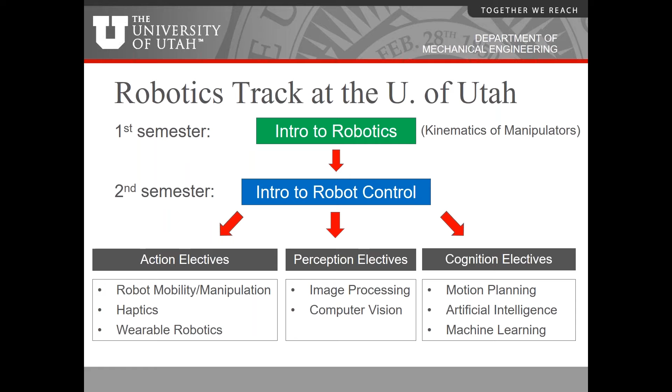To put this into context, we have a robotics track at the University of Utah where we offer master's and PhDs in robotics, and I came to Utah to be part of this track. We have a couple of gateway classes: intro to robotics in the first semester, mainly kinematics of manipulators, and then in the second semester, intro to robot control, which is my course that I've developed and been developing over the last decade. Both of these classes act as a gateway into our electives in the robotics track in various areas.

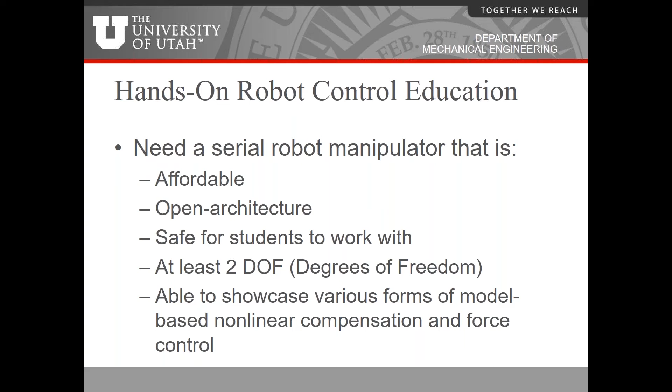In terms of hands-on control education, what I was originally looking for when I developed my robot control class was a serial robot manipulator that is affordable, open architecture, safe for students to work with, has at least 2 degrees of freedom, so we're able to showcase various forms of model-based nonlinear compensation and force control. There really wasn't anything out there that satisfied all this criteria, to my satisfaction at least. On one end of the spectrum, you could make a do-it-yourself device like the haptic paddle for under $100, but it only has 1 degree of freedom, so it's limited for teaching students more advanced concepts of robot control, controlling multi-degree of freedom systems, and compensating for nonlinear dynamics.

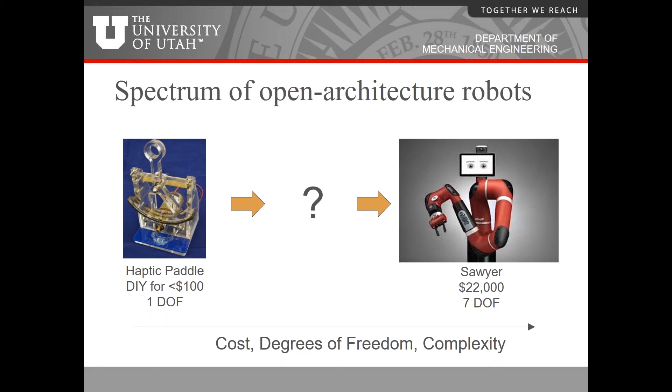On the other end of the spectrum, you could buy something like the Sawyer robot from Rethink Robotics for $22K. It has lots of degrees of freedom and can showcase all kinds of advanced robot control methods, but it's almost too complicated a starting point for students to control 7 degrees of freedom. So I really wanted something in between, and that's where Quanser came in. I approached Quanser over a decade ago now.

It's nice because since the units are all modular, we can take them apart. We can start by having the students learn to control 1 degree of freedom modules. We do that in our classical control class as well as our state space control class.

We have various of Quanser's other add-ons such as the inverted pendulum add-on and flexible link and flexible joint add-ons for these modules. But when it comes time to use these in my robot control class, we put them together with the 2DOF add-on and form these 2 degree of freedom manipulators, which are just complex enough to demonstrate some of the nonlinear model-based compensation techniques, but not too complex. Makes a good starting point for the students.

They're very safe to use. They're incapable of harming anybody. The current to the motors is strictly limited to 1 amp, so they can't really have enough torque to hurt anybody. The other nice thing about these robots is by mounting both of the motors on the base on the table, you avoid carrying the weight of the second motor on the links themselves. So we can use nice lightweight links and get nice high-speed motion out of these linkages while keeping the heavy motor stations on the base of the robot.

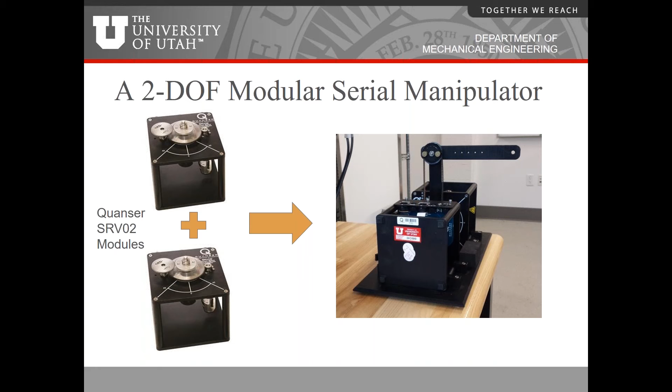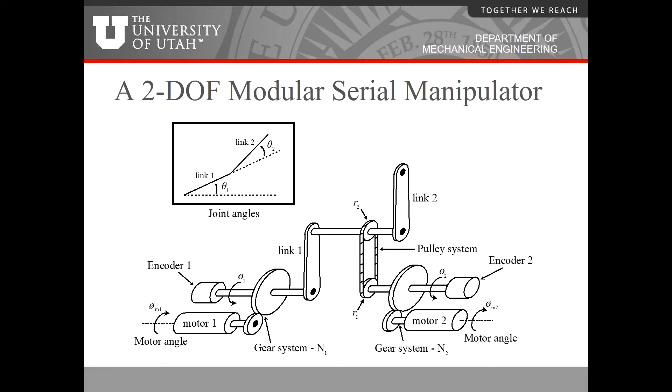So motor number 2 is driving link number 2 through that pulley system, allowing motor number 2 to keep its weight on the table rather than on link number 1. Encoder number 2 is positioned such that on the near side of the pulley system, it's actually measuring the absolute angle of link number 2, which turns out to be convenient, as I'll show you in a minute.

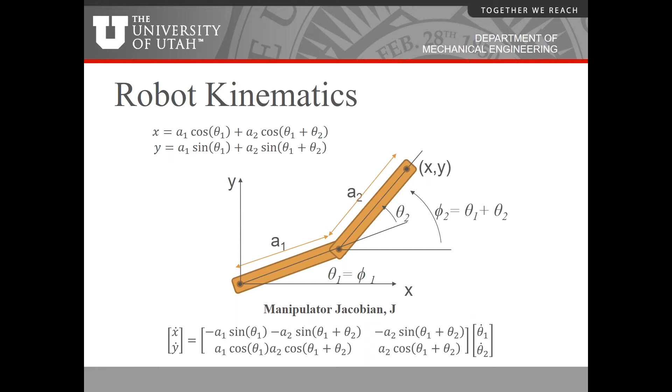Again, I won't spend too much time on these kinematics, but this is the first step in presenting the math to our students. We show them how you can relate the position of the end effector of this robot, XY, to the joint angles, theta 1 and theta 2. Here in this figure, theta 1 and theta 2 are the relative joint angles between the 2 links. You can see how those are related to phi 1 and phi 2, the absolute joint angles of the 2 links. The two are related between each other via what we call the transmission kinematics.

There's a matrix that relates the relative joint angles thetas to the encoder angles phi, which happen to coincide with the absolute joint angles of the robot through this matrix, which we call the pulley Jacobian, which contains ratios of pulley diameters. In our situation, the pulley diameters are equal to each other, so everything simplifies to a very simple pulley Jacobian, which means that what our encoders are measuring corresponds to the absolute joint angles of the robots with respect to the base frame of the robot.

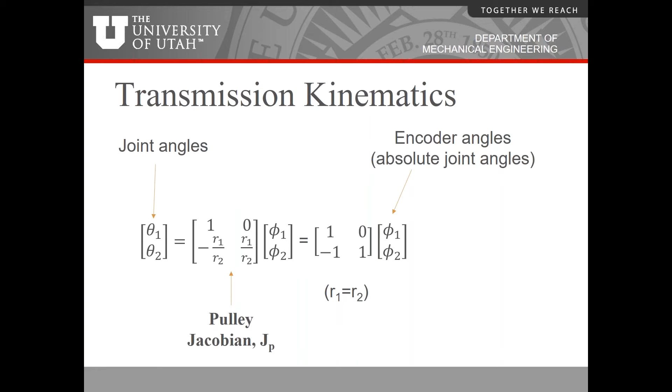We also emphasize with our students the duality of this Jacobian. The Jacobian for this robot not only relates the velocities of the joints to the velocity of the end effector, but it also relates the torques between the joints and the forces at the end effector. This is going to come in really useful when we do various kinds of force control.

We can actually compound our manipulator Jacobian J with our pulley Jacobian JP to form one big compound Jacobian that maps directly from our encoder angles, what we're measuring, to the end effector or operational space or task space velocities of the robot. That same compound Jacobian transpose is what relates the forces at the end effector to the joint torques.

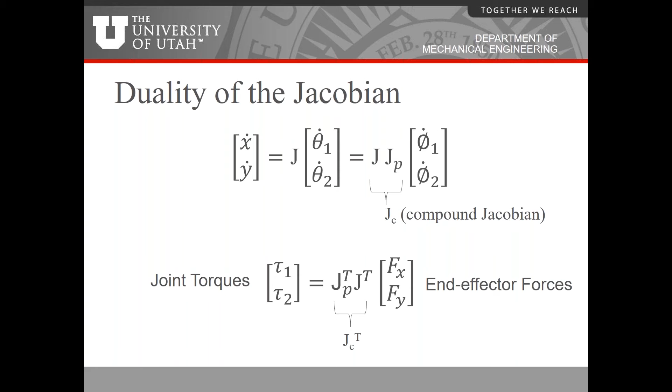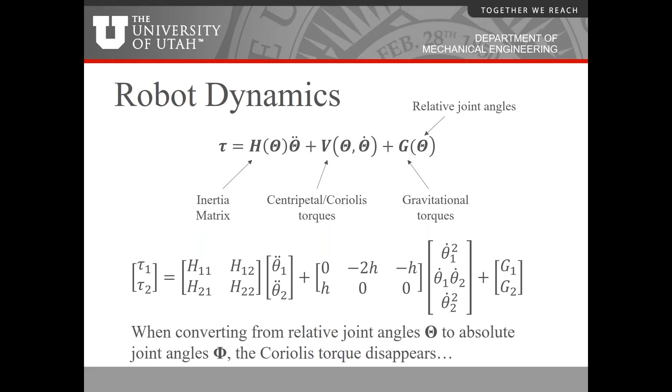The interesting thing about this robot, the way we've configured the kinematics with that pulley system, is that when you convert from relative joint angles theta to the absolute joint angles, which is what we're measuring with the encoders, the Coriolis torque actually disappears. Some of you may know the Coriolis torque is just an artifact of using a relative coordinate system, and so when we abandon those relative joint angles, those go away.

So here's what our final dynamics of the robot look like. On the left-hand side, we have gear ratios N1 and N2 times motor torque constants, KT1 and KT2, times the current. So we're actually controlling the current to our motors.

In addition to these 2-DOF robots from Quanser, we also have some of Quanser's AMPAQ amplifiers that are capable of sending controlled current to each of the motors. We do it that way because by controlling the current to the motors, we can make sure that we're not sending too much current. We can keep our motors from burning out, and we don't have to worry about back EMF terms appearing in our dynamics when we control the current.

On the left-hand side of the equation, we're inputting current, and on the right-hand side, we have all the torques again: the inertia torques, the centripetal torques, Coriolis torques have gone away, gravity, and then we can also add in some frictional torques. For this Quanser robot, we've relied on Quanser to provide us with the mass parameters of all the links, and we've experimentally identified some of the friction and damping parameters. So we have good values for all of the numbers that go into the dynamic equation.

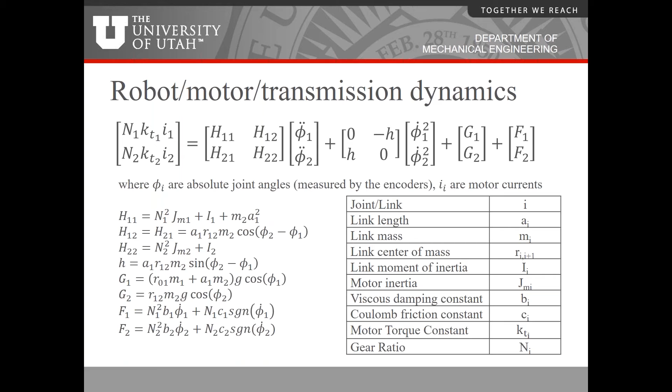And therefore we can use that knowledge to compensate for all the nonlinearities of the robot as we teach the students how to control it.

In teaching the students how to control the robot, we do it both in simulation and in real time on the real hardware. This is one of the nice things about being able to use MATLAB and Quanser's QUARC software. So we have MATLAB, we have Simulink, and we have QUARC installed from Quanser. In addition to that, I put together a custom graphical user interface, which I programmed in MATLAB, that allows the students to visualize the motion of the robot.

The way this works is the graphical user interface places an event listener inside of the Simulink model on one of the scope blocks. I'll show you in a second. As the Simulink model is running and sending data to a scope block, that data is then sent over to my graphical user interface, which uses those joint angles to plot the configuration of the robot. We can do this in simulation, or in real time on the real hardware.

Let me close out my PowerPoint presentation for a moment and switch over to MATLAB and show you how this works.

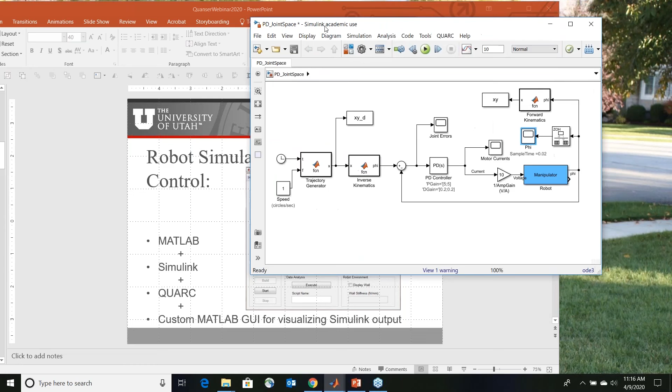Here's an example of one of our most simple Simulink models, where the students start out with basic PD control on both joints of the robot. This is basic decentralized control; we're not doing any model-based compensation right here. I've got this blue block in my Simulink model that's simulating the dynamics of the robot manipulator.

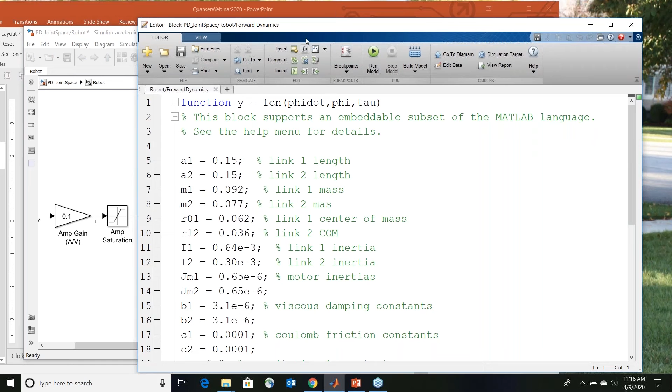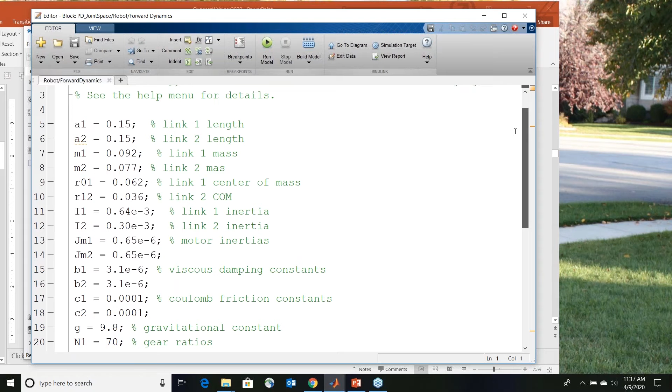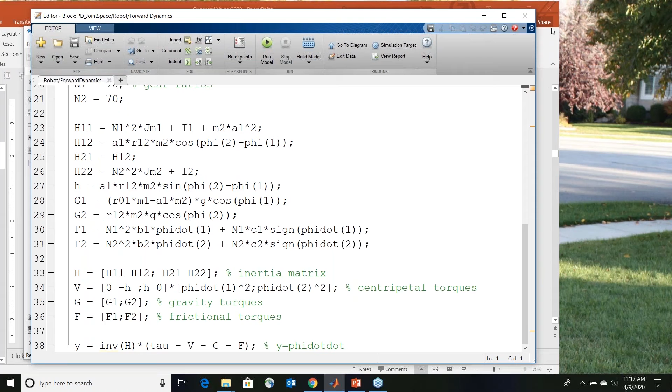If we look inside of there, we've got the forward dynamics of the robot programmed in as an embedded MATLAB function. You can see here, I've got all of those mass and friction parameters of the robot plugged in with the actual values we've experimentally identified. Then we can form our gravity matrix, our friction matrix, our centripetal matrix, our inertia matrix, and we put this all together and basically simulate the actual dynamics of a real robot, based on the parameters as closely identified as possible.

So we've got this blue block outputting phi, our encoder angles, as if we were actually measuring those. We compare them to a desired trajectory. I've got a trajectory generator here generating a circling trajectory in operational space for the robot, so we're essentially telling the robot to draw a circle in space as best as it can. We pass those through the inverse kinematics of the robot, which creates a desired trajectory in joint space, or encoder space. We form an error in joint angles and then penalize that with a PD controller, and we're all set to go.

At this point, you can just hit the play button on this Simulink model and run it as is, or you can run it through my graphical user interface. So we type in the name of my model, hit load, and then I can change the speed of the trajectory. That pokes different values into my Simulink model, and then I can hit the start button, and it commands my Simulink model to start running.

Here we can visualize the motion of the simulated robot trying to draw a circle in task space, or operational space. This is a relatively slow trajectory, and you can see that at slow speed, the robot does a pretty decent job of drawing the circle and tracking the desired trajectory.

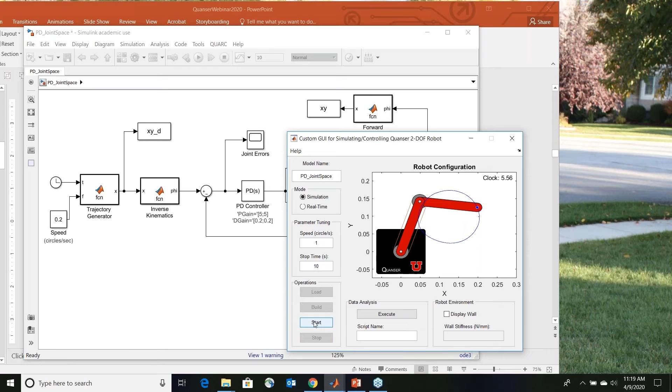But if I stop this and speed up my circle to one circle per second, now you can see the robot's going to have a harder time dealing with the nonlinear torques created by the inertia coupling, the centripetal torques, the frictional torques. So the circle is kind of egg-shaped because of those nonlinear dynamics.

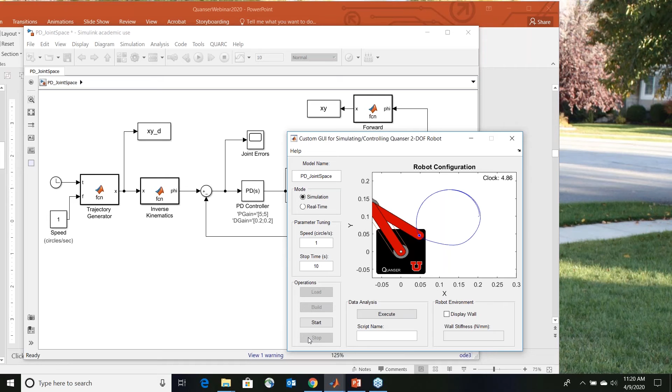So what the students find out is that using PD control alone is not enough to do good trajectory tracking at high speed. We could try to increase our PD gains even further, but then you end up saturating the amplifier - you can't deliver enough torque to the motor. So the message moving forward is that we need to learn to compensate for these various nonlinear dynamics, for the inertia coupling, for the centripetal and Coriolis stuff, in order to get good trajectory tracking at high speed.

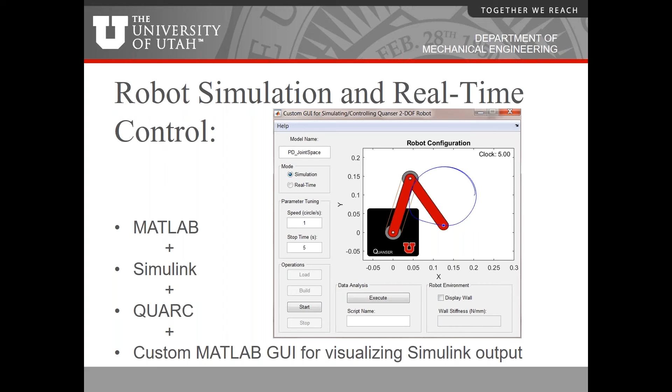So again, the great thing about this is the students can try their controller first in simulation, make sure that it works in simulation, then they can take that exact same controller, swap out the blue block for the hardware input and output block, and try that exact same controller on the hardware with the exact same values and see how it works in real life.

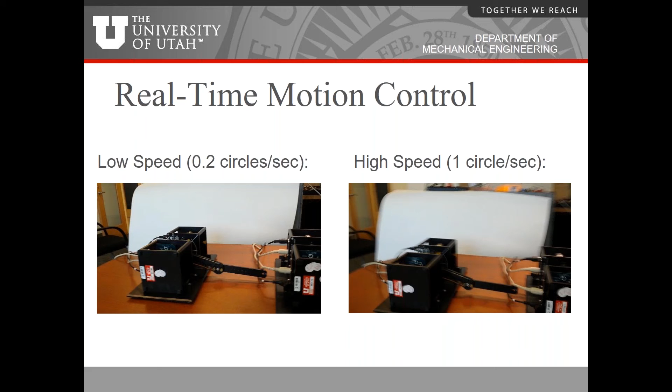I'll show you quickly some of the different controllers that we teach the students. So again, this is the one I showed you a moment ago in Simulink, simple decentralized PD control. There's no model-based compensation at all here - each joint is penalized with a proportional and derivative gain, and each joint is doing its own thing without regard to what the other joints are doing. So yes, the robot can draw a circle, but it doesn't do very well at high speed.

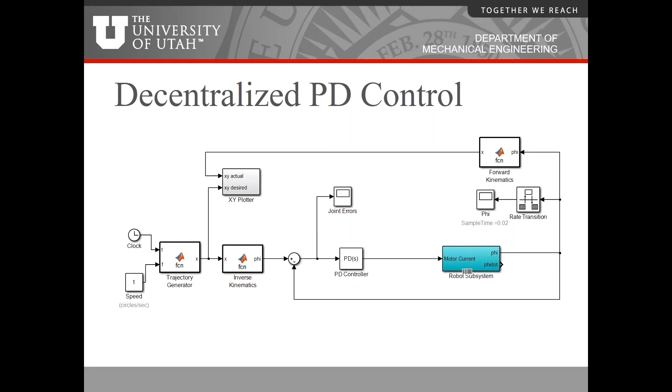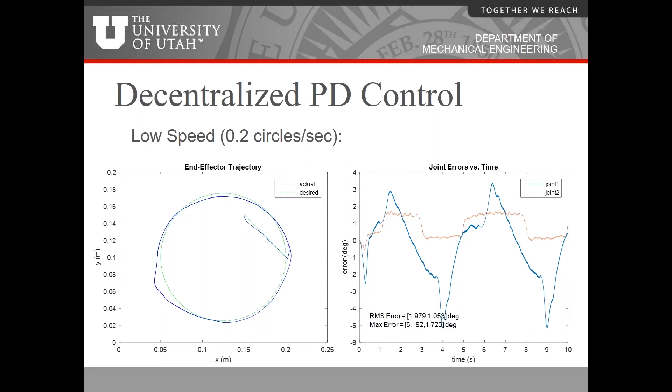Here's an example. It shows a plot of the actual trajectory over top of the desired trajectory, and we can plot the joint errors versus time. The students can compare the performance both at low speed and at high speed. We can see at high speed, the trajectory becomes even worse due to those nonlinear dynamics.

And so then we go through a progression of different tracking controllers. We next try computed torque feed-forward control, where we have a complete model of the robot dynamics and use that to compensate for everything. Then we have inverse dynamics control.

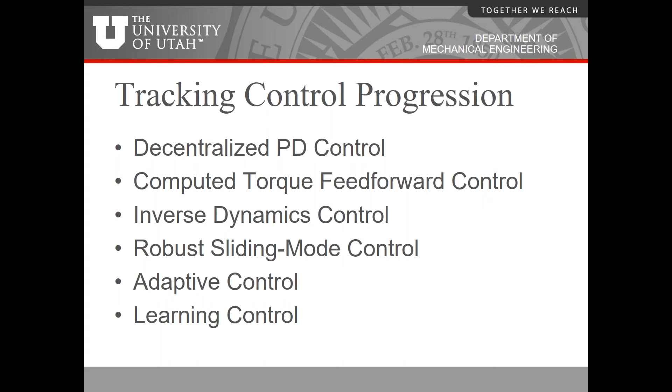It contains a complete model of all the dynamics of the robot - all those inertia parameters, friction parameters, gravity parameters. We're basically using the desired trajectory of the robot to calculate at each instant in time how much torque each of the robot's joints need to compensate for all of those dynamic effects.

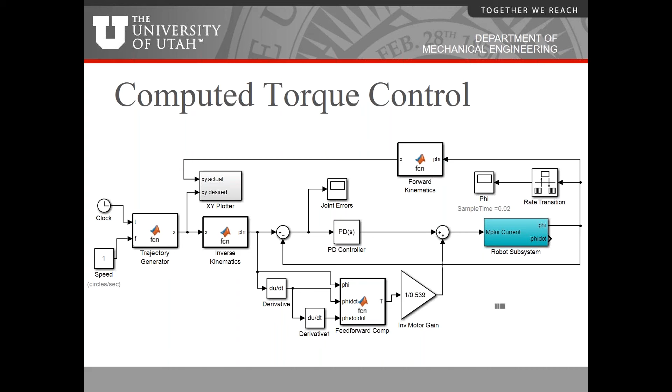And then we feed that forward to our manipulator. Okay, so that works much better than PD control alone, but it's still not really decoupling the dynamics for us. If you recall the slide showing the dynamics of the robot, the inertia matrix is coupled - a torque on one joint creates motion on another joint and vice versa. So in order to do the best control, we need something that can decouple that inertia matrix so that if there's an error on one joint, I can send torques to both joints in the right proportion to reduce that error.

That's what inverse dynamics control does for us. This is the next step in teaching the students. We have some feedback compensation in this case that cancels out gravity and centripetal torques. But then we take our inertia matrix and place it in series with our PD gains here. This actually decouples the influence of the PD gains on the robots.

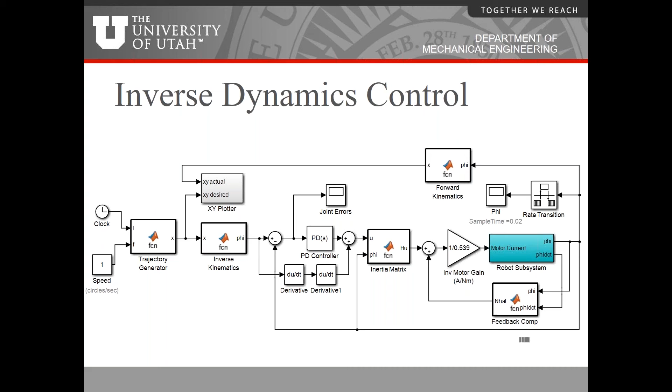By multiplying the PD gains by the inertia matrix of the robot, which is coupled, that distributes torques to both motors of the robot in just the right proportion to take care of error on either of the joints. So this is what we call centralized control - rather than each joint doing its own thing, now we have one centralized controller sending torques to both motors in just the right proportion to handle the errors.

Then we can try robust control. So we have the same inverse dynamics control down here, but then we pick off our tracking error and create a sliding surface up here. Some of you may be familiar with sliding mode control. It's kind of like a bang-bang controller that hits your motors as hard as it can in one direction or the other, depending on the sign of the error.

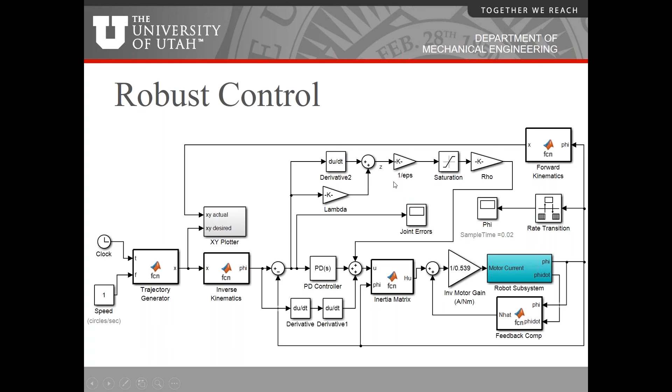Adding in the sliding mode action, the torque from the sliding mode controller comes down here and adds in with the effort from our PD controller. The students find that this works really great in making your controller robust against modeling error. So now they can go in and intentionally alter some of the mass parameters in this blue block, or some of the friction parameters, pretend that they don't have an accurate model of the robot, and see how well this robust controller compensates for that.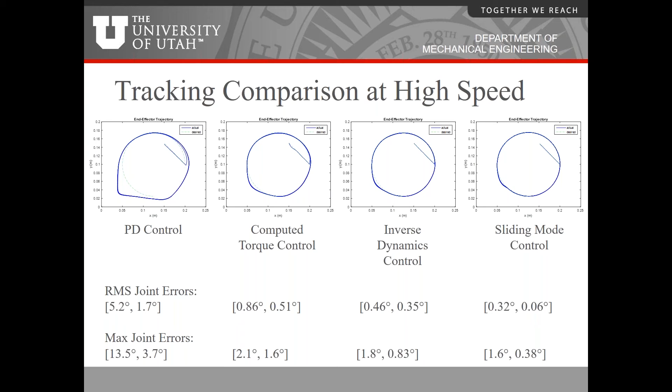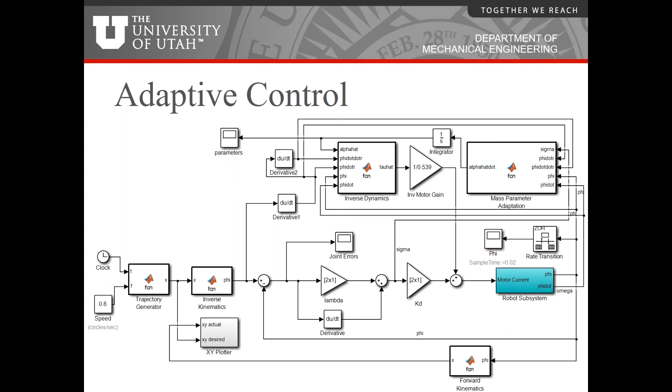And then we can also do adaptive control. This would be a scenario where we're pretty confident that we have the dynamic equations correct for the robot, but what if we didn't know the values of all those mass parameters? So we can teach the robot to adaptively learn what those mass parameters are. When we implement adaptive control, the robot will start circling, and with each circle, it'll get progressively better as it's adapting to the unknown mass parameters of the robot.

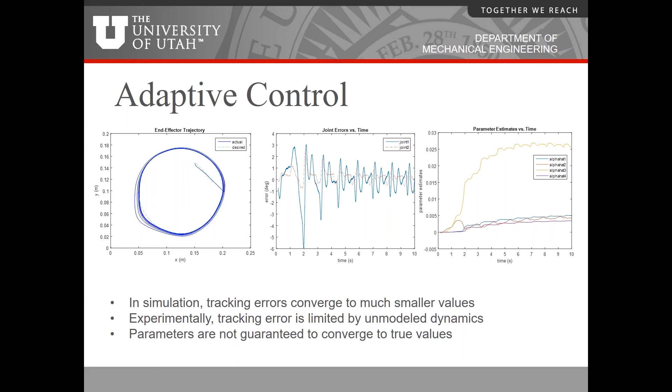So it's a fun learning experience for the students. They try each of these controllers out in simulation first, and then they try them on the real robot hardware. And of course, nothing works as well on the real hardware as it does in simulation. That's the real value of having a hands-on education like this - they can see what really works on the real robots.

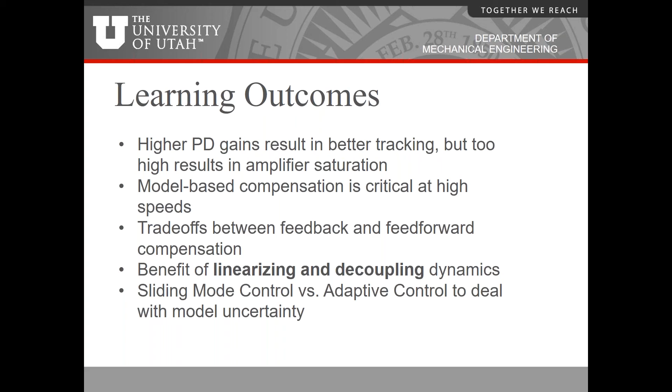So just in summary for that section, the learning outcomes are: students learn that higher PD gains result in better tracking, but too much results in amplifier saturation. And so you need model-based compensation, especially at high speeds, to get good tracking error without saturating your motors. Students can see the trade-offs between feedback and feed-forward compensation, the benefit of both linearizing and decoupling the dynamics of these robots, and they can experiment with different ways of dealing with model uncertainties, such as sliding mode control versus adaptive control.

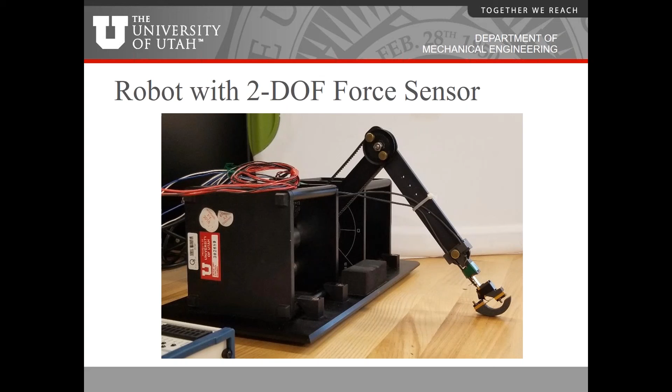Okay, so what's even more exciting: we spend the first half of the course doing these various types of motion control, and then in the second half we do various kinds of force control. In order to do force control, we came up with a way of making our own 2-degree of freedom force sensor on the cheap that we could add to the end effector of our Quanser robot, as you see here with a zoomed in view.

So we purchased some thin beam load cells from Omega, under $100 each, and 3D printed some parts to hold those. We've got the two thin beam load cells oriented orthogonally to each other, so we can measure forces in both the X and Y direction of the robot as it moves in the plane.

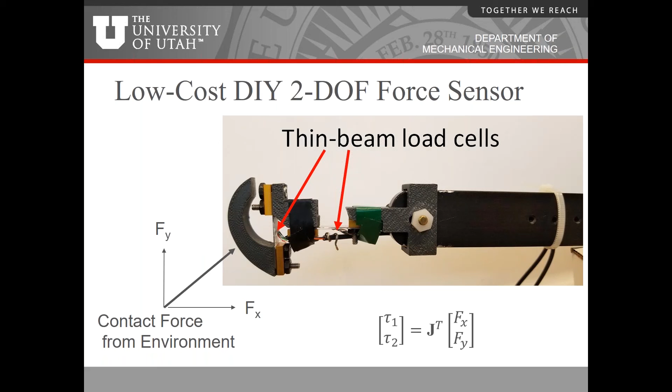And then, of course, a reminder that if we measure these forces, Fx and Fy, that the robot is pushing on the environment, or the environment is pushing on the robot, depending on how you look at it, we can use the transpose of our Jacobian to map those back to equivalent torques at the joints of the robot, in order to compensate or apply the required torques to match the force.

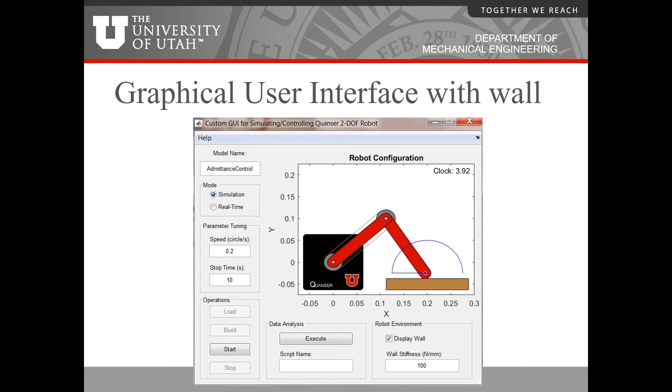So before we introduce force control, we teach the students about how to switch your controller from joint space to operational space. All the controllers I showed before are in joint space: we're generating a desired trajectory, using the inverse kinematics to put that in terms of the joint angles, and then we feed back our joint angles, creating an error in the joint angles and penalizing that with PD gains. So our penalty is occurring in joint space.

The alternative is to do this all in operational space, or task space. Here, we generate our trajectory in XY coordinates for the end effector, but now we don't need the inverse kinematics anymore. We form an error in operational space in terms of the error in the position of the end effector, and penalize that with a set of PD gains. That creates a penalty force in task space, and then we use the Jacobian transpose to map that back to an appropriate penalty in terms of joint torques, which you can then send to our robot manipulator.

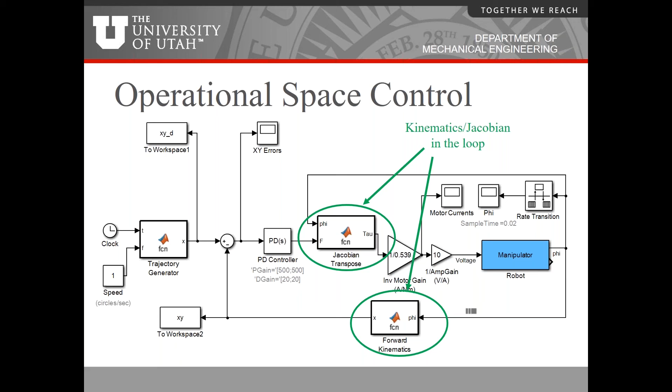And then, of course, we need the forward kinematics in the loop so that we can take our encoder angles phi and calculate the position of our end effector to feed back and compare it to our desired position. So this is an operational space controller where we have the Jacobian in the loop, and the students appreciate the utility of knowing the Jacobian. In this case, the compound Jacobian—we've got to include the pulley Jacobian in there to properly map between operational space and joint space. And then we do a progression of different force controllers.

So starting with this PD control in operational space, we can teach the students to do what I call stiffness control, which basically means you just intentionally lower the PD gains in certain directions.

For example, if I want the robot to be pushing against the tabletop and not exert too much force, we don't want to damage the robot or the force sensors. I can lower my PD gains in the Y direction, the vertical direction, to mitigate the force against the tabletop. Those PD gains act like a virtual stiffness and damping on the robot. We can upgrade that to full impedance control, where we specify a desired stiffness, mass, and damping in both the X and Y directions for the robot to behave like.

We then teach the students compliance and admittance control, which are very similar, but the causality is flipped. I'll talk about that in a second. We teach hybrid position force control, and then we can do stuff with multiple robots. So we try some multi-arm coordination using 2 robots and some master-slave teleoperation using 2 robots.

Here's an example of what happens with stiffness control. If I take that PD control in operational space and lower my PD gains in the Y direction, then when the robot comes into contact with the tabletop, it reduces the contact force. The robot's actually trying to do a circle still, but then it hits the tabletop, and it's forced to only do a hemicircle trajectory when it really wants to do the full circle trajectory. This entire direction where it's cutting across the circle, that's when it's in contact with the tabletop. We can plot the forces versus time over here.

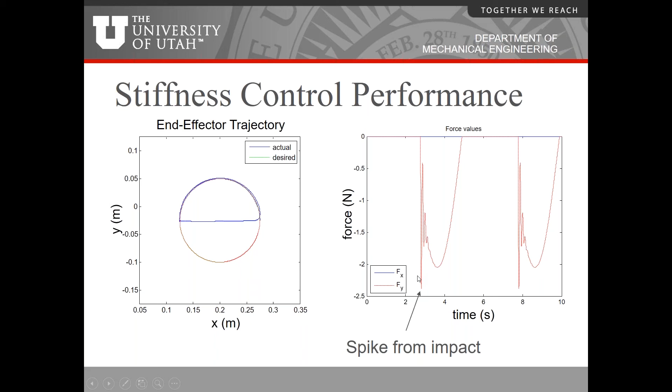That's when we need to move to full impedance control. With full impedance control, we actually put the inertia matrix back in here. It's kind of like inverse dynamics control. In order to control the inertia of the robot, technically you'd need to feed back acceleration, but we don't like to do that because we don't have an acceleration sensor, and we don't want to double differentiate position signal, which leads to noise. So instead we cheat by feeding back force as a measure of acceleration, and then we can divide that by our desired mass matrix.

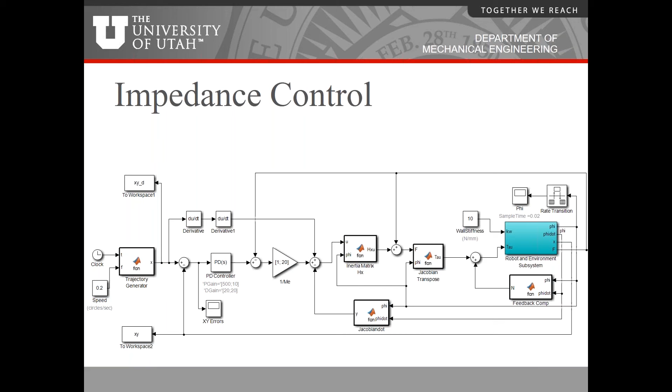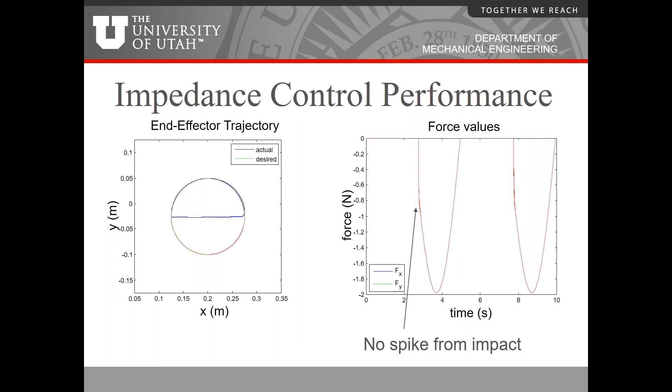So right here, this 20 means that I'm trying to reduce the effective mass of the robot by a factor of 20 in the Y direction. We're taking this heavy, in quotes, robot and making it behave like it's much lighter than it really is. When we do that, we can see that we get rid of that impact force. Now it's as if the robot virtually has much less inertia than it did. So when it hits the wall, that impact force no longer creates a big spike.

We can do something similar with admittance control. Here the causality is flipped. We're taking force feedback from the robot, putting it through a compliance or admittance transfer function, and using that to alter the desired trajectory of the robot in a mass spring damper-like behavior. Then you can control the mass, stiffness, and damping by picking the parameters in this transfer function.

You can see in this case, I've got a Y admittance, so I'm making the robot behave like a mass of 1, a damping of 10, and a stiffness of 25 in the vertical direction. There's 0 admittance in the horizontal direction, since we want the robot to keep doing good tracking in the X direction, but be sensitive to the force in the Y direction.

We can feed that back and alter our desired trajectory in response to the force from the force sensor. The benefit of admittance control is I can keep my PD gains very high, so I still get really good trajectory tracking when the robot is not in contact with the wall. But when the robot is in contact with the wall, it's very sensitive to that force according to the admittance parameters that I define.

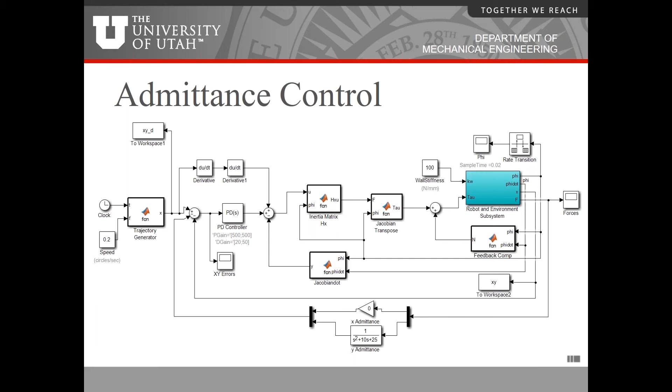The only downside of admittance control is the students find that it's much less stable than impedance control. Because of this admittance transfer function, we're adding a couple extra poles to the dynamics of our system. That makes this system more prone to going unstable, especially when you're in contact with a relatively stiff wall. The wall stiffness acts as part of the root locus gain in the system, so a stiff wall drives the system unstable for admittance control.

So similar performance with the admittance controller, only much better trajectory tracking than impedance control. But like I said, it has stability issues when the environment's stiff.

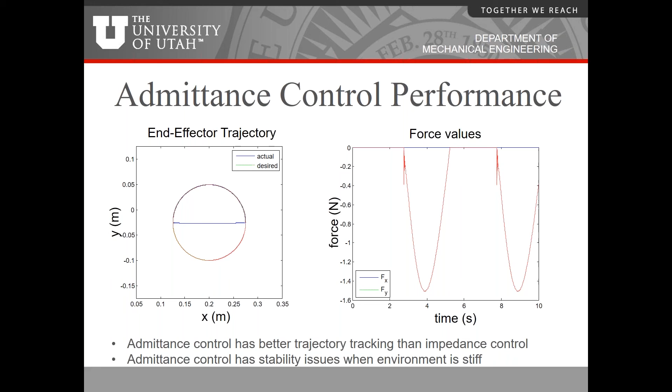And then we move to hybrid position force control. This is where you want to control position in some axes, but force in other axes. So again, picture the robot stroking the tabletop. What if we want to actually control the force against the tabletop to some desired level while stroking back and forth in the X direction? And so that's what this does.

So we have on the upper half here a position controller, generating a sinusoidal trajectory back and forth in the X direction for the robot. And then on the bottom half, we have the force controller. We specify a desired force of -2 in the Y direction, basically telling the robot to push down on the table with a constant force of -2 newtons while stroking in the X direction.

So we penalize both the position error and the force error, and then pass those through a pair of selection matrices, which basically says only do position control in the X direction, only do force control in the Y direction, then add those two control efforts together at this big central summing junction. Over here, we've got inverse dynamics control again, which decouples the dynamics of the robot so we get good performance.

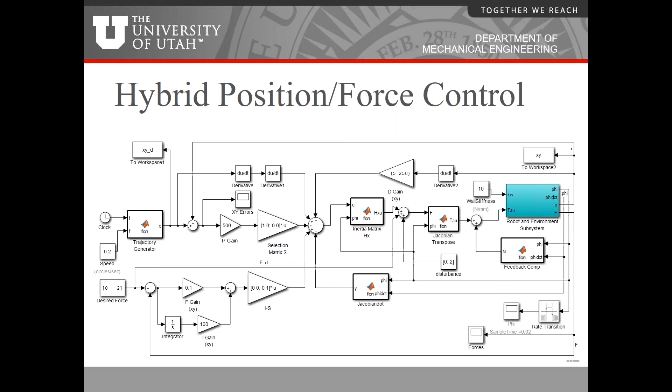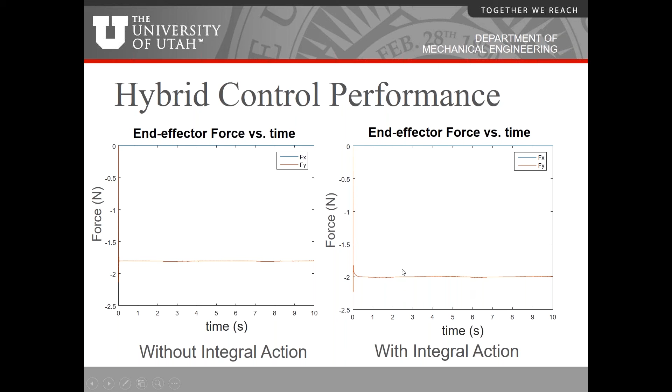So the students can try that as well, both in simulation and on the real robots. Then the students can monitor the forces versus time. They can see how, for example, on the left, without any integral action on their force controller, it can't quite get to the desired force of -2 newtons. With the integral action on the force controller, they can get exactly the 2 newtons of desired force that they want.

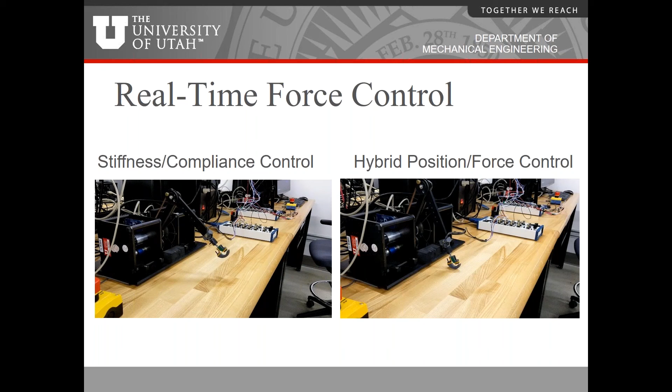Here's some videos. On the left, you can see the stiffness controller. The robot's trying to draw a circle, but the circle brings the robot into contact with the tabletop. By making the robot compliant in the vertical direction, that mitigates the contact forces that occur when it hits the tabletop. On the right-hand side, we have a video of hybrid position force control, where the robot is stroking back and forth on the tabletop, trying to keep that force against the table to a constant 2 newtons while stroking back and forth.

And then of course, in practice, with the real robots, we've got friction coming into the picture. So the students can see, okay, in simulation the hybrid controller did great, but now in practice, when we've got all this friction present, how is the hybrid controller actually doing?

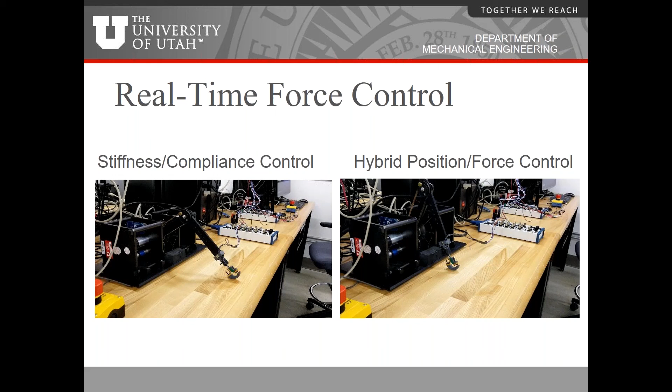I'll skip this since we're running low on time.

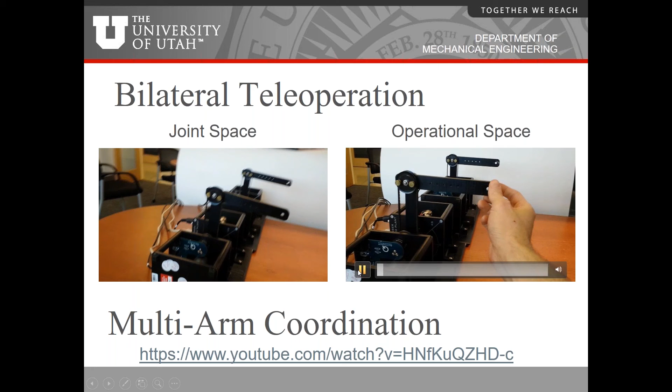We can also do teleoperation with a pair of these 2DOF robots. One can be the master, one can be the slave. We can do this both in joint space and in operational space. When I grab the master and move it, the slave robot is basically replicating the joint angles of the master robot. Or on the right-hand side, we do the same thing in operational space, only now we're just telling the slave robot to follow the end effector position of the first robot.

And so the fun thing is when you do this in operational space, if you bring the robot to its singularity, you can get the slave robot to toggle between its elbow up and elbow down position. The operational space controller doesn't care whether the robot's in elbow up or elbow down as long as the two end effector positions are still matching.

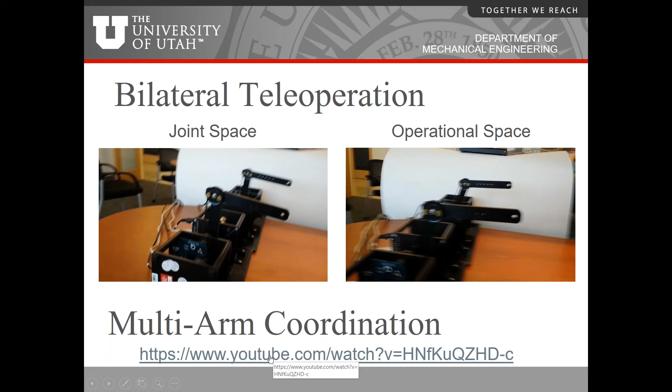And then we can also do multi-arm coordination. I'm going to click on a YouTube video here. This was a special project that some of my students did at the end of the semester.

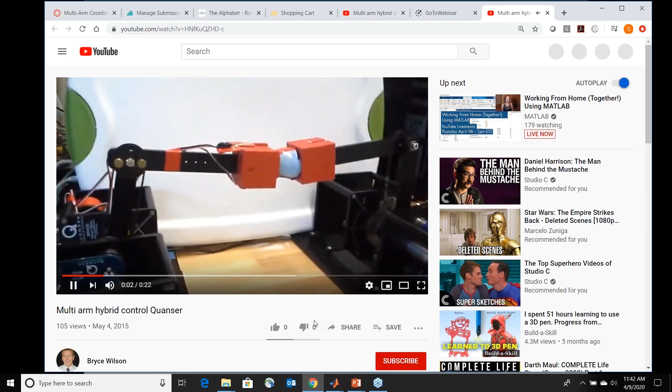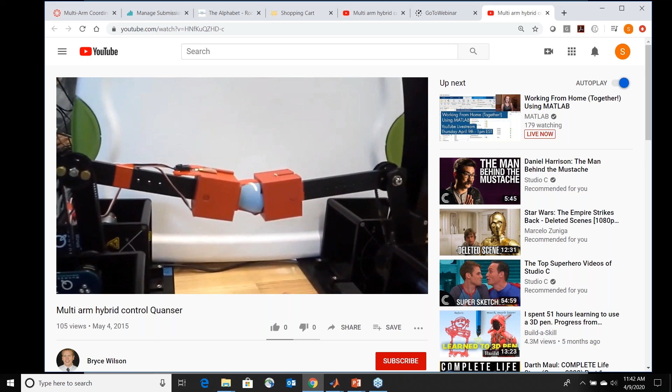They got 2 of the robots to cooperatively work together to carry an egg. We implement this multi-arm coordination as a form of hybrid position force control. By formulating a special task space, you can get the 2 robots to share the burden of both controlling the position and the forces on the egg. That's kind of fun for the students to do.

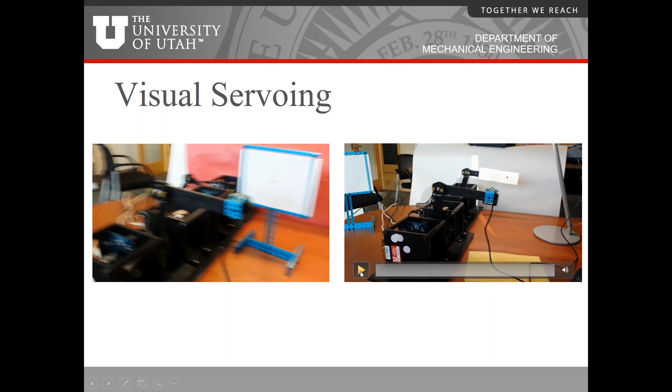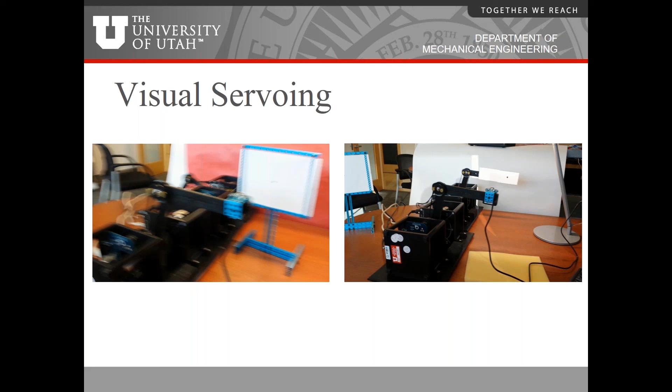Position control, various forms of position control take us through the first half of the semester. Then all of these force and interaction controllers take us through the second half of the semester, and we're done.

Just to summarize, we've developed this 2DOF robotic platform. It's modular, you can take it apart, and use it with different Quanser add-ons. It's open architecture - this is really important. We can directly control the torques on the motors to compensate for all of these nonlinear dynamics and various kinds of force control. It's safe to use, not capable of hurting anybody. And it has just enough degrees of freedom to demonstrate the key robot control principles, such as compensating for nonlinear dynamics, using the kinematics and the Jacobian in the loop to map between joint space and operational space. Working in operational space makes it convenient to try all these different kinds of force control and teleoperation and multi-robot coordination. So I'm going to stop here and open it up for questions.

Thank you very much, Steve, for a fantastic presentation. Very, very interesting stuff, especially the simulations of your visual servoing, comparing it to the reality was very interesting.

We do have quite a few questions. Some are focused on the technicality and the different types of control algorithms that you use, but there's also a few on the course itself and the nature of the course and its prerequisites. So let's try to get as many as possible, and encourage people to continue sending their questions. But the first one, let's start with one about the controller. The question is, what are the advantages of using a PD controller, and why not use a PID?

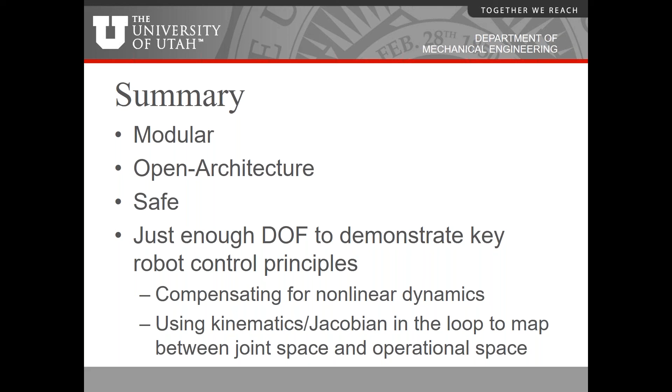Thank you very much. The next question is about force estimates. How do you calculate or estimate the forces, the contact forces that are being applied to the system? So when we do this in simulation, well, I can actually show you.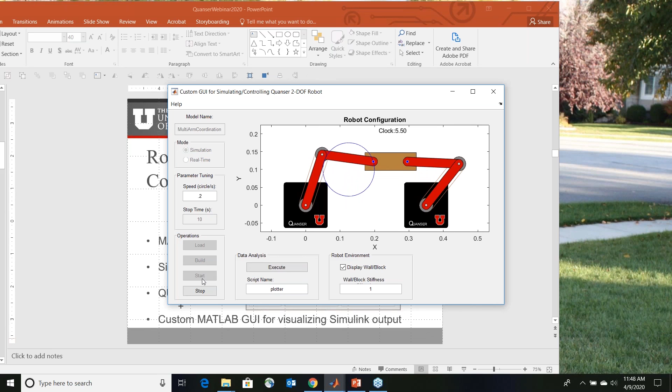Since you asked, here's a simulation of two robots working together to carry an object. If I look in the Simulink model, in my blue block, it's now changed from a robot dynamics block to a robot environment block. And in here, I have a block called block dynamics.

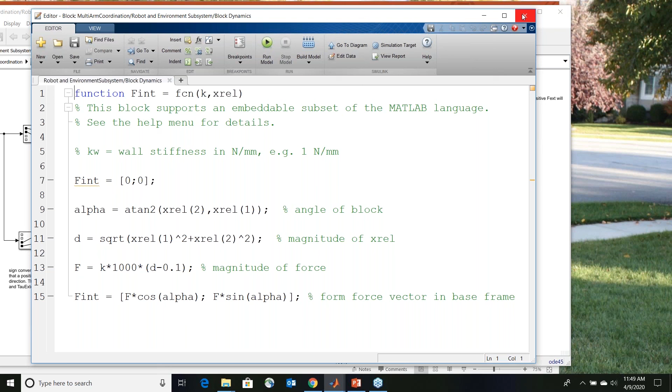I'm basically programming the block, in this case the environment, to act like a spring. So it then simulates forces based on a spring law for the environment. It does the same thing when I've got a wall in the environment, approximating the wall as a virtual spring where I can set the stiffness. And so it generates these virtual forces, which I can feed back and use for simulating my force control.

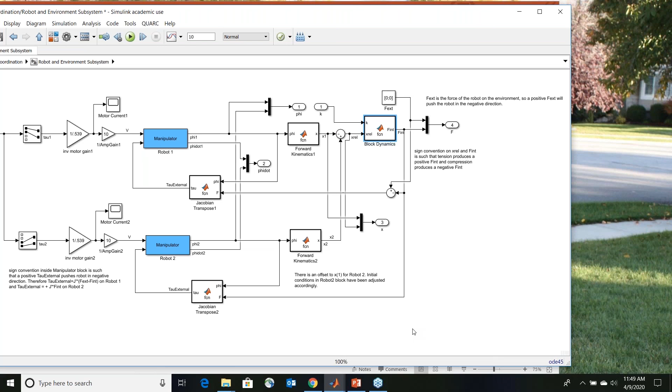Of course, when we do this on the real robots, I actually have that 2DOF force sensor on the robots, which measures the force in the X direction and the force in the Y direction. That's in the frame of the end effector of the robot, so I can use a rotation matrix to rotate those into the base frame, and then use that in my various forms of force control.

Thank you so much. One more, in the visual servoing example, what type of controller was being used there? Yeah, so that was an image-based visual servoing.

So Quanser has these handy blocks that work with the Point Grey Research cameras. They have a block that will capture an image from the camera for you, a block that'll process that image, and output the XY coordinates of the dot in the image. And so then we can use those XY coordinates of the dot as features for image-based visual servoing.

So I can specify my desired feature values, basically the pixel coordinates of the center of my image. I desire for the dot to be in the center of the image. I compare that to the actual XY coordinates and then put a penalty on that. And then I have to create an image Jacobian that maps between feature space and joint space of my robot.

And so the controller looks very similar to my force controllers, only instead of penalizing the force and using the manipulator Jacobian, in this case I'm penalizing the image features and using an image Jacobian.

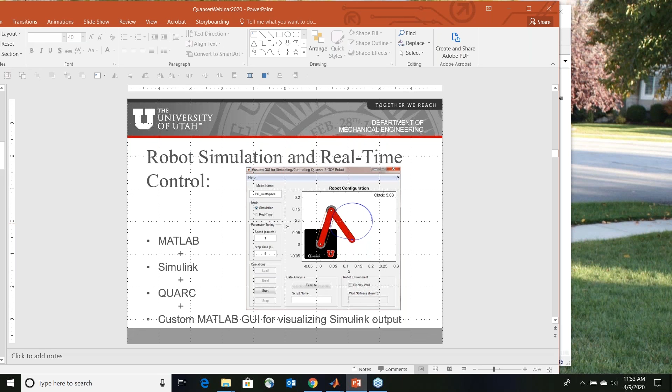So just a couple of last questions now, more focused on the nature of the course, because it does seem like such an interesting course. First of all, there's a question about the prerequisites of the course. It seems like there's a lot of material to cover in one course. So first of all, is it a semester-based or an annual course, and what are the prerequisites?

Everything else we cover ourselves. I'm basically spending one 80-minute lecture on each of these different types of controllers. So I'll spend a lecture on feed-forward control, a lecture on inverse dynamics control, a lecture on robust control, a lecture on adaptive control. I don't have time to go into super depth on the theory of all of those things, but I give the students just enough information to know how to implement each controller and have an intuitive understanding for what it does. Then they can go on and take other advanced control classes in our department if they want a whole semester on nonlinear control, for example.

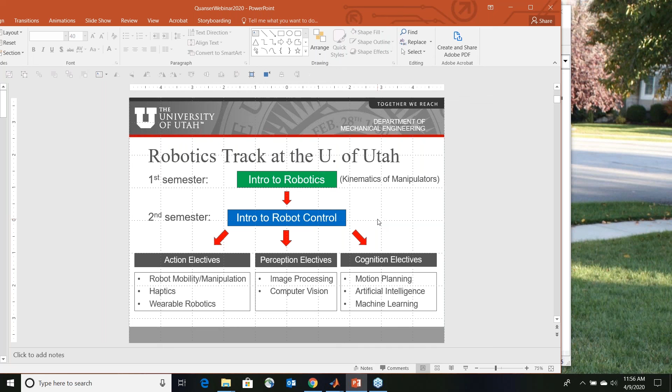Got it. Maybe we can take this one as the last question since we're approaching the top of the hour. You spoke about a Simulink block in which you have the dynamic model of the robot implemented, and then eventually you replace it with the actual connection to the hardware. When students go through that and switch from simulation to hardware, I guess people basically want to know how good your model is. Do they see any difference, and if so, what are they? Have you left them in intentionally, or are they things you haven't been able to model?

Yeah, so there's a big difference in tracking performance when you move from simulation to the real robots. And that's to be expected, right? Because in simulation we're using a perfect model, so we perfectly cancel out all of the gravity, inertia, and Coriolis centripetal effects. But our model is far from perfect, so for all of these controllers the tracking error is much larger on the real robot versus in simulation. But in a relative sense, you can still see the same progression - even in experiment, the inverse dynamics control does better than feed-forward control, and robust control does even better yet.